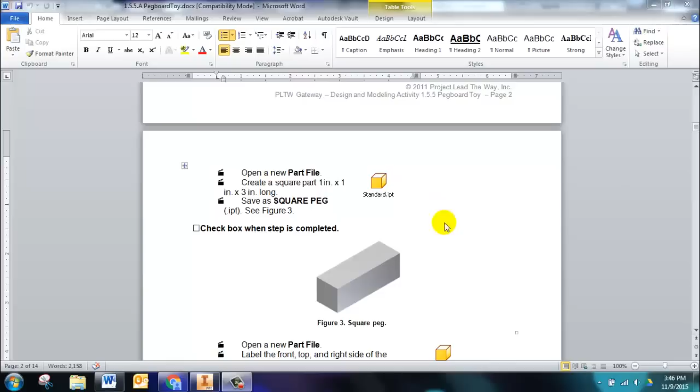If we scroll down in our document, it says to open a new part file, and we're going to create the pegboard below. Look at the shapes: it's 3/4 of an inch high, 5 3/4 of an inch wide, and 3 inches in depth. Both holes should be properly centered both vertically and horizontally within the rectangular base.

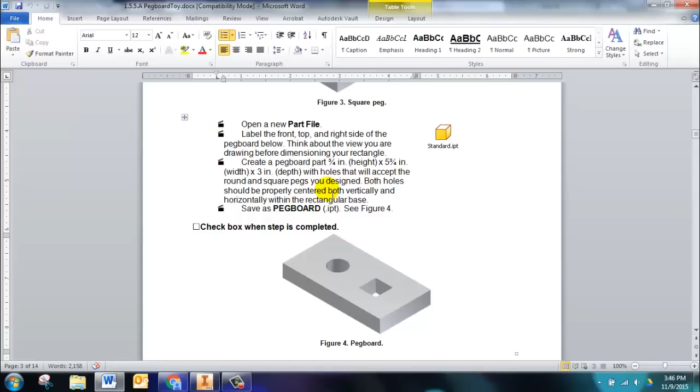So let's think about that while I go to Inventor. Notice in Inventor I'm still in the pegboard project, and I'm going to create a new part. This one's a little more involved, so I'm going to go ahead and take time to save it right now, and I'll just call it Pegboard.

Oh, I don't want IPJ. I'm glad it said that. I don't want IPJ, that's a project. I want a part file. So I just want to make sure I get Pegboard and that it says IPT. I'm glad I saw that. So now we're creating a Pegboard IPT.

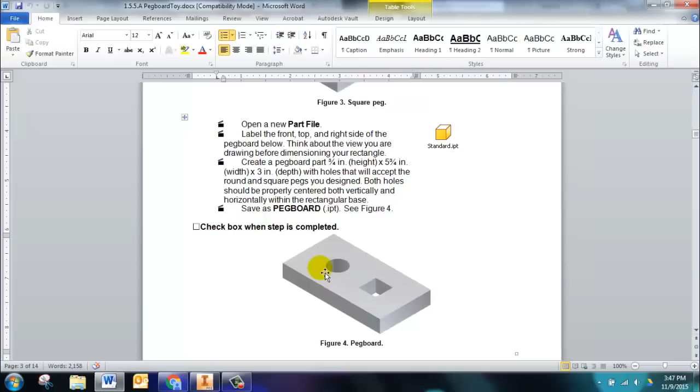When we look at the shape, let's go back and look at it again. I could draw a rectangle, but I would still have to come back and cut these holes out separately. Or I could draw a top view with these shapes already on there. I think it's going to be better if we do that. Let's try that - oh boy, I may change my mind later.

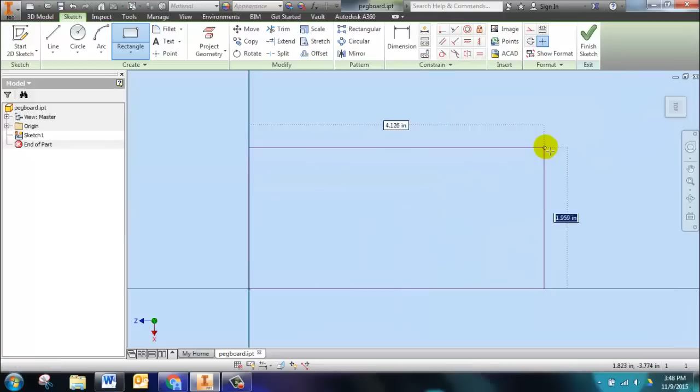Let's find out. So we'll start a sketch, and I'm going to click on this sketch plane here because it represents more of a top view, right? I'm going to zoom, pan, and draw a rectangle, making it as big as I can without any dimensions. We'll make it somewhere in this neighborhood, right there, something like that. Now, how big was it supposed to be?

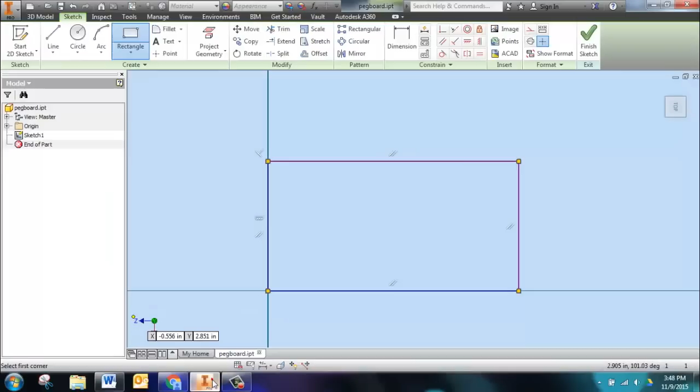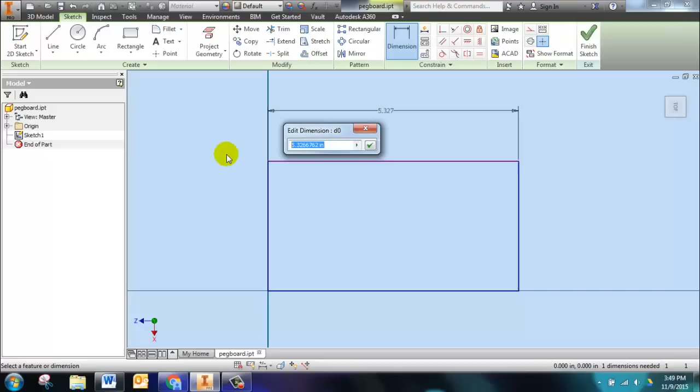All right, so this should be 5 3/4. So we have to either - whoa, what did I click on? That's what I meant to click on. You go away. Okay, so 5 3/4 can be expressed as 5.75. And then the other value is 3 inches, so this dimension over here should say 3 inches.

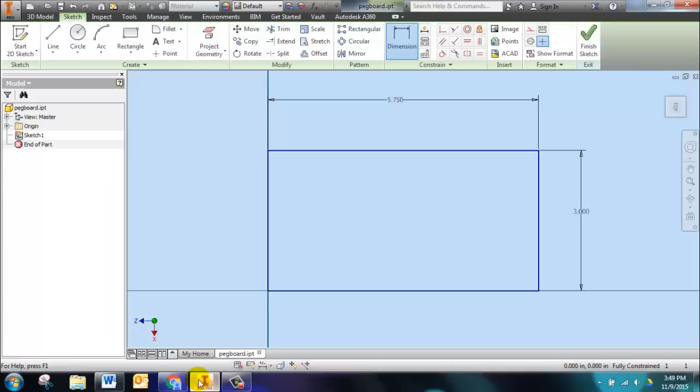Now there are some other shapes on there, and this is the part I'm kind of going back and forth on - should we go ahead and draw the circle and the square? Let's go ahead and do that. So I'm going to draw a circle, and I'll go ahead and throw the rectangle on there also. Notice I very purposefully drew them slightly different sizes because I did not want any extra constraints.

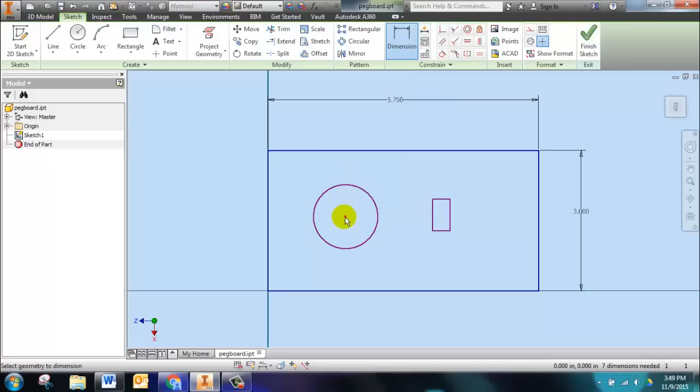Nothing extra. So to dimension the circle, I need to provide a size dimension. I don't know why it's shaped like that, that's so weird - and it should be 1. My square should also be 1 and 1. And now we have to talk about where they belong on our pegboard.

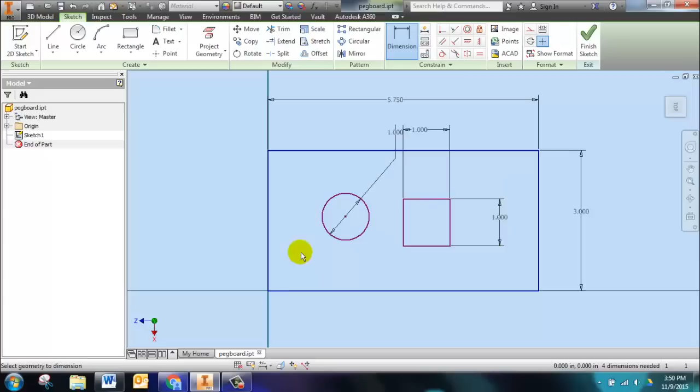Well, if the whole thing is 5 3/4, and I want these to be spaced evenly, then we get to do some math, or we let the computer do the math. Who wants to do the math, you or the computer? Yeah, I agree, let's let the computer do it. So let's dimension the circle from the center point to this bottom edge.

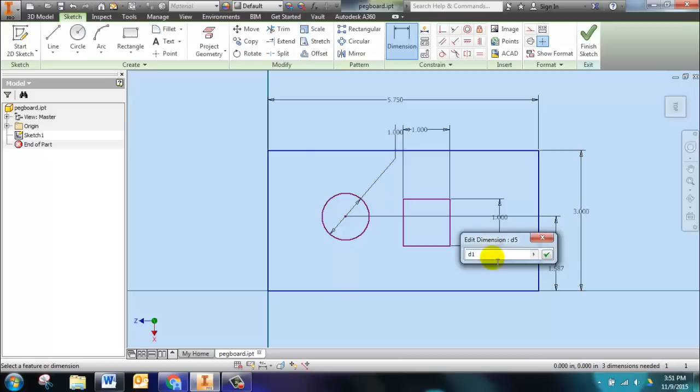And to be centered, it should be half of this, right? So check this out, this is awesome. I'm going to click on this dimension, and instead of changing this number myself, I'm going to highlight it, make it go away, and click on this dimension. See how I put D1? That means this is D1, dimension 1. Dimension 1 divided by 2.

Green check mark. Now the nice part about doing it that way is if we change this number, this would automatically adjust. So that's a bonus.

That's awesome. Now we need to do this one the same way, but we don't have the luxury of a center point, so we actually have to do this. We need to think of a relationship of this dimension and this dimension. Well, it's 1/3, isn't it? So if I dimension from here to here, instead of changing this to a number, I'm going to click on this divided by 3, 1/3.

Nice, nice, worked out really well. Now that takes care of our dimensions in this direction. What about our dimensions this way? How are we going to position those in such a way that they're evenly spaced? This, again students, is called parametric dimensioning, and it's tricky.

So I'm going to dimension this center point to this edge, and I'm just going to put it up here for now. And then I'll dimension from this edge to here, maybe—that's one way we could do it. Now those numbers aren't good right now. I'm just moving this dimension down so that it's out of the way.

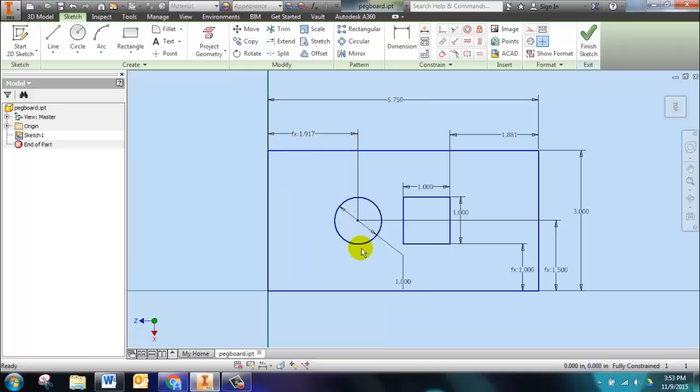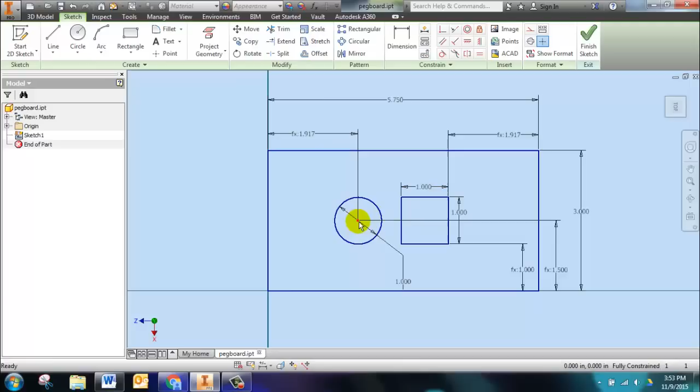Nice, nice. Now can I do the same thing with this? Let's try. If I type this dimension divided by 3, that doesn't look very evenly spaced. And the reason is because we went to the center of the circle, but here we went to the edge of the square. So the way we have to modify that is we have to adjust this value so that it relates to the center of our square.

Well, we want to go half this much, right? We want to go 0.5 more. So watch how we do that. I can actually type in plus 0.5. Whoa, that went the wrong way, didn't it? I needed to say minus 0.5. So we can actually adjust our values accordingly so that now our square and our circle are evenly spaced along this width, and they're centered along this depth.

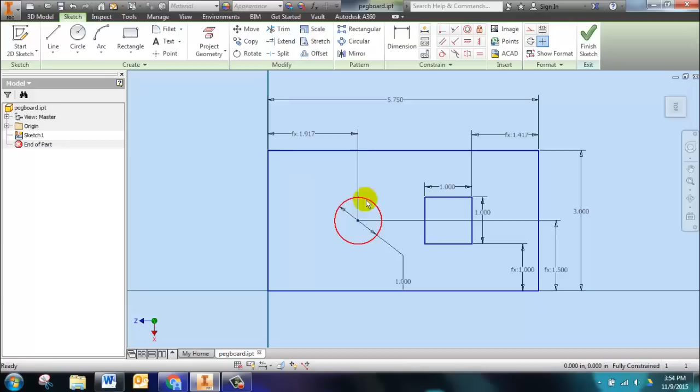Wow, that was a lot for one part, huh? Well, let's finish the sketch. Whoa, zoom out—let's go ahead and extrude it. You remember the distance? 3/4. Now notice it didn't pick the profile; I have to actually click on here and then type in my 3/4, and then say OK.

Nice, good job. Congratulations, you have successfully completed the pegboard. Please go back and rewatch parts of this, especially the parametric dimensioning. That is something that takes a lot of practice, and it's a little bit of a challenge to wrap your head around it.

Just understand that every dimension is given a name: D0, D1, D2, D3. Those are the names of the dimensions. And then what we do with those, we can perform mathematical operations to those. But there's our pegboard. I'm going to click Save, and then I'll eagerly wait for you at the next step, which is creating the assembly of our parts. Good job again, congratulations.